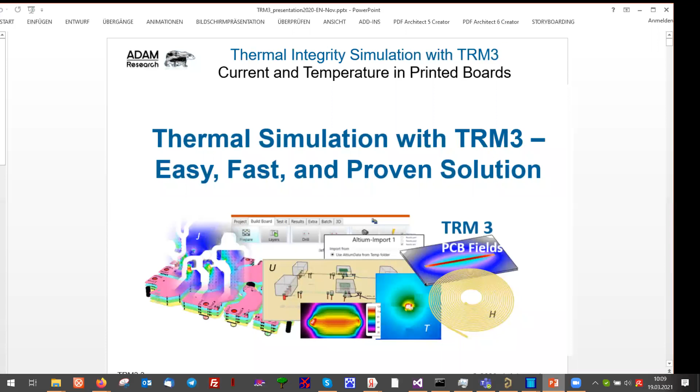So, hello, everybody. Thank you for participating in this demo. We are talking about printed boards, temperature, but also about current and voltage and watts and so on. TRM is a type of software dedicated to simulate the thermal behavior of printed boards. It's thermal risk management. And you know that the temperature is always limited either by the board parameters or by the silicon and junction temperature and so on.

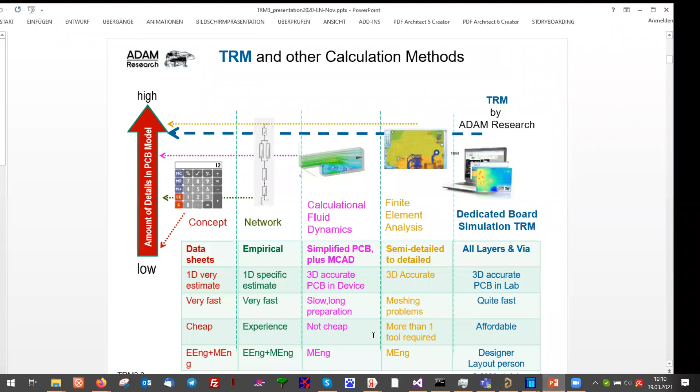Maybe you think it's easy because we have data sheets, but it's not easy because the data sheet does not represent your special PCB, neither the stack up, nor the layout, nor the distribution of components and so on. So even if we have identical heat sources on a board, we get different temperatures depending on the local environment of this component and the local heating and the local cooling. So a data sheet is never representing your board. What can we do? Of course, we can simulate and calculate.

And because it's a board simulation, we rely on the standard files to receive the data. And the standard files are the Gerber files, the drill files. And for the components, we are using IDF, but you can also draw your own components using your mouse. And for the net list, we have different ways. For example, the IPC format 356. And you can feed in CSV and ASCII files and so on to create non-standard stuff.

Using the Gerber is not sufficient. We also have to supply physics data. For example, the watts of the components or the amps in the nets and so on, but also ambient conditions. So what is the ambient temperature of the board? What is the heat transfer from the surface of the board to the ambient?

Is it standard air cooling by free convection, or do we have a fan with a certain fan speed and/or air speed and so on? And at the end, you get a result, of course, the temperature. But if we use amps to heat the traces, we also get a distribution of the electric potential, and we get the current density. And from the current density, we get the heating. And the heating is giving some temperature. Of course, watts and amps can be combined. That's okay.

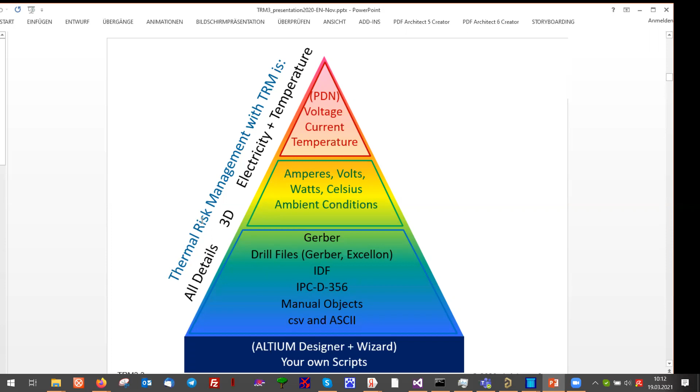What are we talking about? We are talking about a flat geometry, a printed board. And the printed board has, of course, a layer stack. Those data and the layout come from your design software. We have components on top, maybe components embedded, which may create heat or not. And we have some sort of components or pads which we can use to feed in electric information. So we have a positive pin or pad and a negative pin or pad, and both are connected by the copper in the layers, and electricity can flow in this direction and is creating heat along its path.

There are of course drilled holes, either plated through holes or blind or buried vias or non-plated through holes. The number of drilled holes does not matter. I've seen models with 30,000 drilled holes.

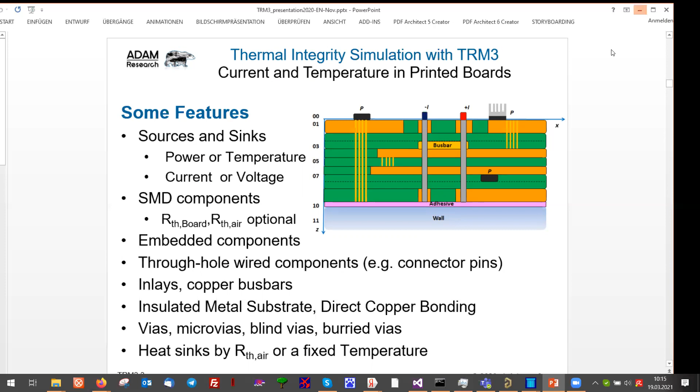You can also add something inside yourself, bus bars, to increase the local width or height of a trace. And you can, of course, bring some heatsink or the parameter of a heatsink, the thermal resistance, onto any component and so on. Okay, that should be enough as a preface. I will now show you the software with two or three different use cases.

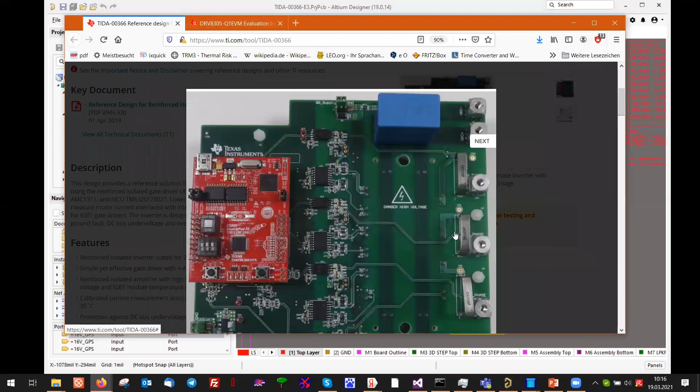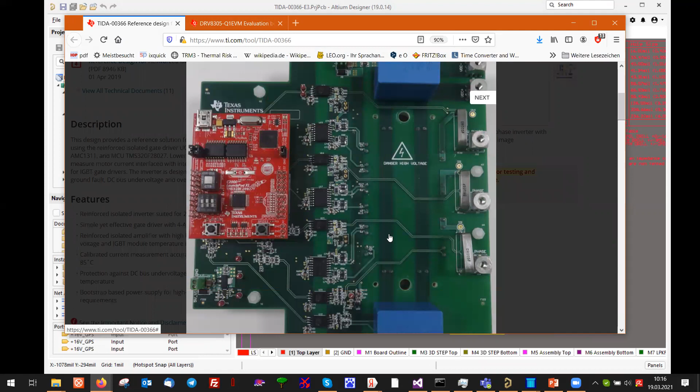So for the Altium users among you, I've looked for a test piece, and I found, for example, this one. It's a Texas Instruments evaluation board with some MOSFETs here and obviously some fat traces or bars to carry a high current from this connector to the MOSFETs. So I will not go very deep into details. It's just a test case.

And my test case poses the question: if I have, for example, 12 amps on this connector, and I allow the current to go this path here to those MOSFETs, what will be the temperature, or what can we expect as an effect of the current heating?

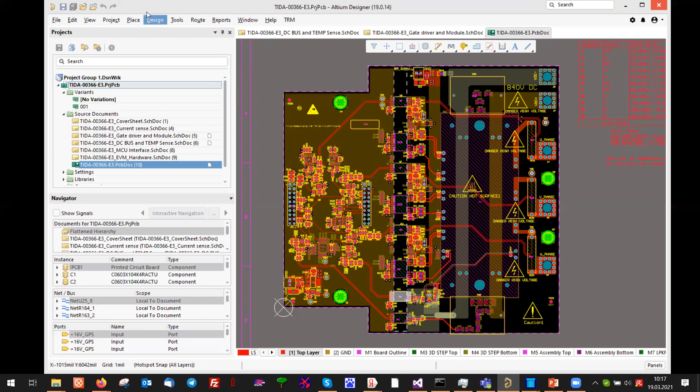What we need is, of course, an Altium project. And now the easy part is we have a button here, TRM. And when I click the button, it's exporting everything we need. But if you want to do it, you can also add some parameters in the schematics.

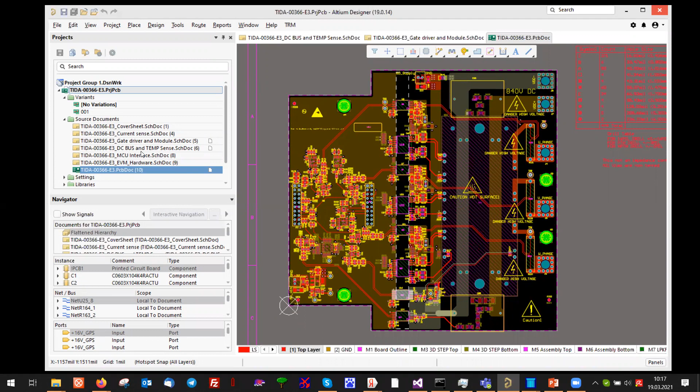For example, we can assign the 12 volt to this connector, 12 amp, sorry, and another minus 12 amp to one of those MOSFETs. And that can be done in the schematic. For example, if I use the gate driver, here you see connector number 9, and it's got a parameter.

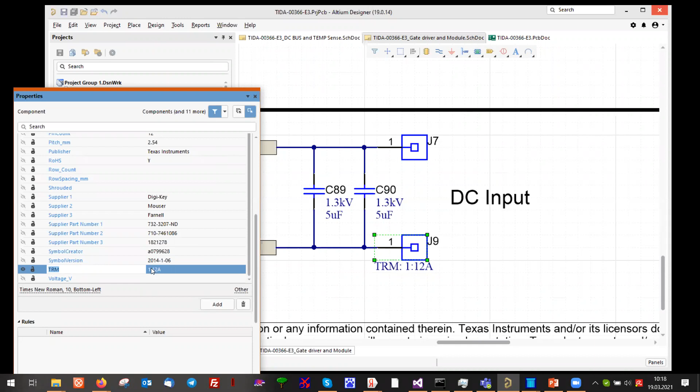The parameter name is called TRM, and the value is 1 for pad number 1 and 12 amp for the data. And you see it here in the parameter list. Just add a parameter and you know what to do. And we have to have a counterpart, minus 12 amp. And the minus 12 amp, I just deliberately used this component, U16.

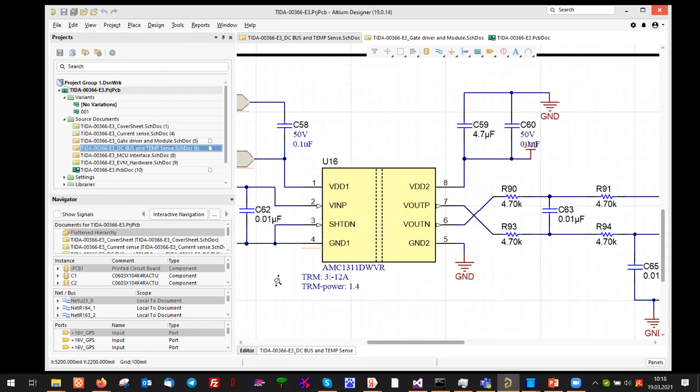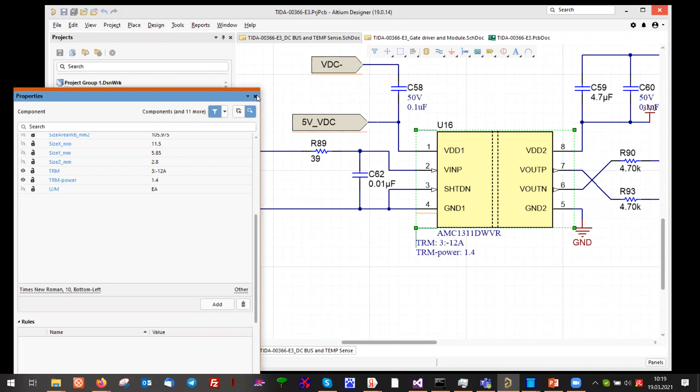And you see pad number 3, which is connected to this net of VDC minus. It's getting 12 amps. Yeah, it's just minus 12 amps. It's just an example. In addition, I can add also a power value in watts, and this value should be 1.4. Everything can be modified, deleted, and changed in the TRM simulator. This is just one way of delivering data.

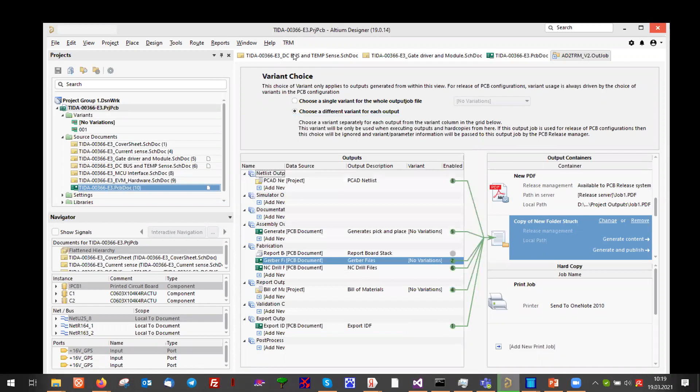Okay, now we go back to the PCB document and say TRM. What you see is a script developed by us, which is starting an OutJob plus some extra work to export these parameters, to export the netlist and the placement of the components, etc. Okay, now it's done. And we can start and open the TRM simulator.

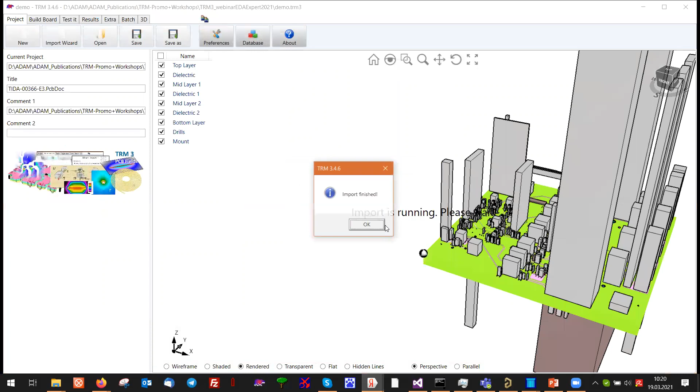I start the import wizard, Altium. I use all the defaults, so don't worry. It's not a training. I have to enter a name for the project. It's reading all the Gerber files. It's also converting all the Gerber files. And at the end, it's done. Don't worry about these very tall buildings, the components.

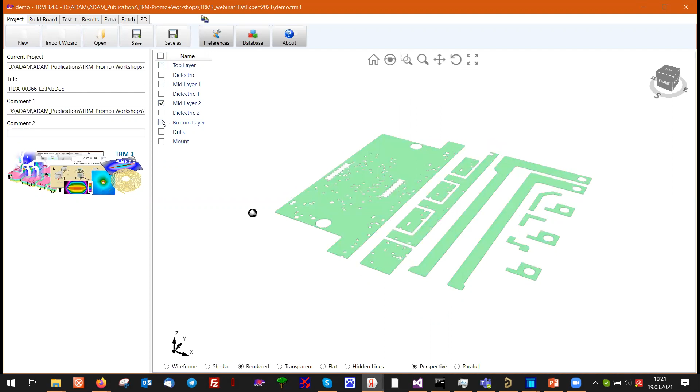We have an expansion factor of 5 by default, so that we can easier look into details of the layers. So this is the import of the top layer. Then we see the bottom layer and so on. We also identify the drilled holes. We have in red the plated through holes, in black the non-plated throughs. There's no blind and buried or back drills here. And we have, of course, the dielectric in between.

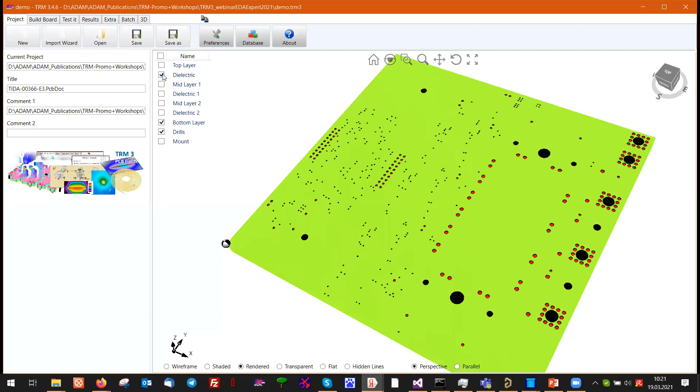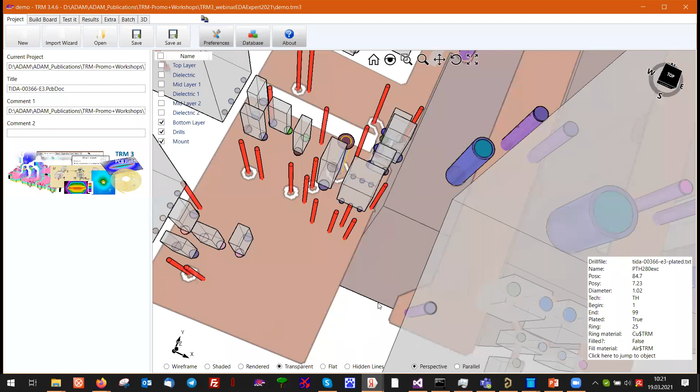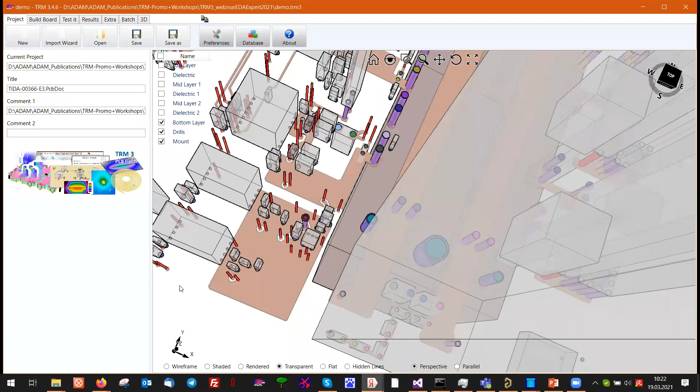And we have the components, but not only the components, this gray stuff. We also have colored pads. For example, I will show you in another table. Here we have this green pad. The green pad is part of the plus 16 volt GPS net, and it's connected to component D4 and connector number 2. And of course, this pad can be carrier of electric values, and the gray parts can be carrier of watts thermal information.

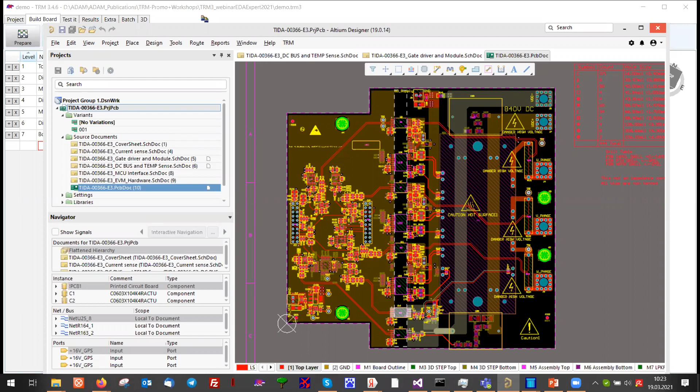If we go to tools, no, design, layer stack manager. You see that the first dielectric is 60 mils, which is more or less this value. Okay, I don't say it's a bug, but we can repair everything here, and you can change your import whenever you want. And you can try and play with all the data to make a good thermal design

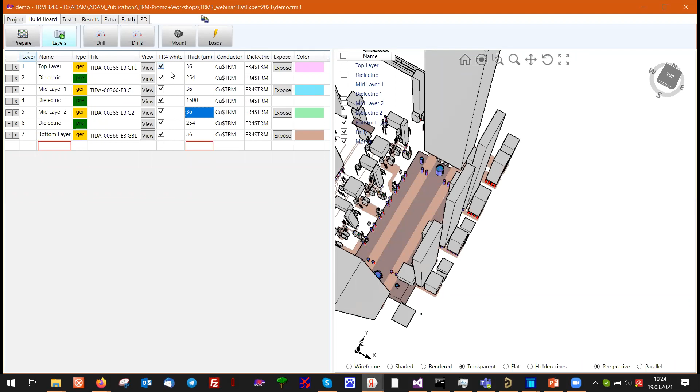for your production phase. Okay, then we have the drill file, so I don't need to go through all the details, but each drilled hole can be touched, can be deleted, can be moved, and so on. At the end, what's interesting for us is what we call the loads table. And in the loads table, you see some interesting stuff. For example, the name of the components or the reference designator. You also see columns called watts, Celsius, amp, and volt. And I think you expect here some value.

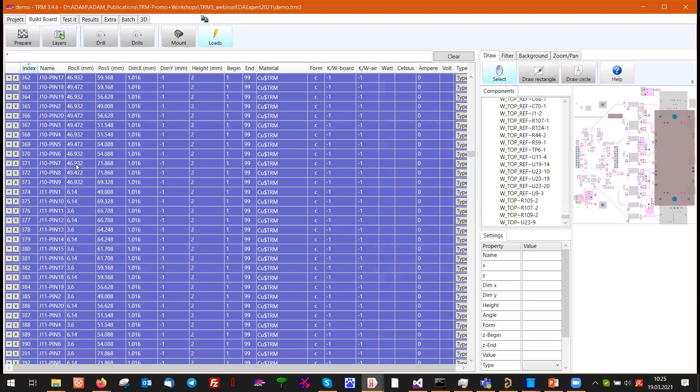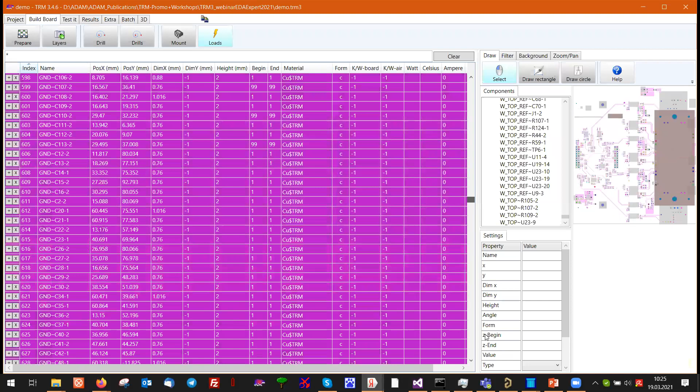Here, for example, the 1.4, remember we added the 1.4 watts in the Altium schematic for component U16, and that's the result of the import. And now I can do whatever I want. Either I accept the 1.4 watts or I say 0, etc. And then we scroll down, we see a list of pins, which are solid pins penetrating the board. And now we have pads here. The pads have a net name, a tilde, and a component name and a number. Somewhere we should have our values from the schematic, but there's an easier way.

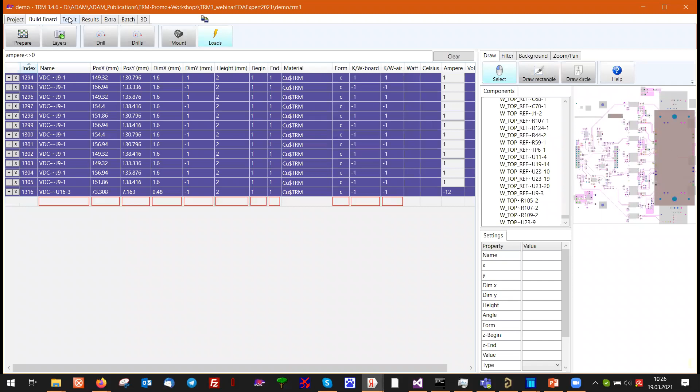Okay, that's all you have to do. And now we can go to the test phase. We can calculate something. First of all, we have to define the environment conditions. So let's assume we are in the lab and we have 25-degree ambient. And we go to calculate, and we can start the calculation. It will take, say, 1 minute to calculate. It's just a push button here.

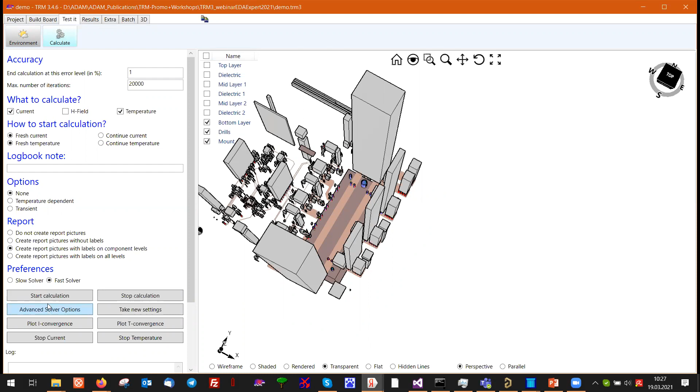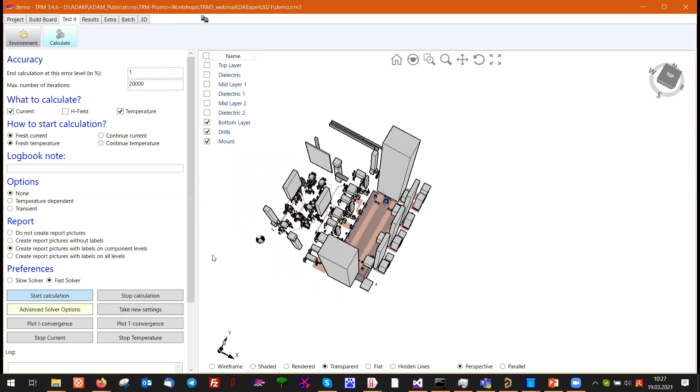But of course, I prepared something for you. We can start, and then I come back after having shown other things. This we can do, of course. There is something special. Okay, and I start the calculation. Here's a log window telling you what it's doing. And so on. It already calculated the heat created by the amps.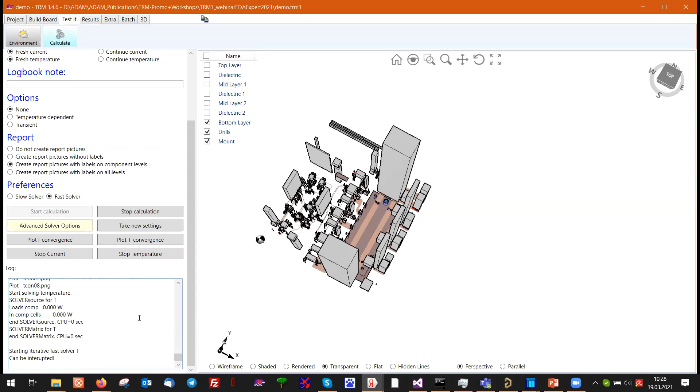It's 2.699 watts. You see it, and these 2.699 watts are now imposed into the trace, and it's heating the board, and of course not only the trace but also the board and so on, and the components. So while calculating the temperature, a short info for the non-Altium users among you.

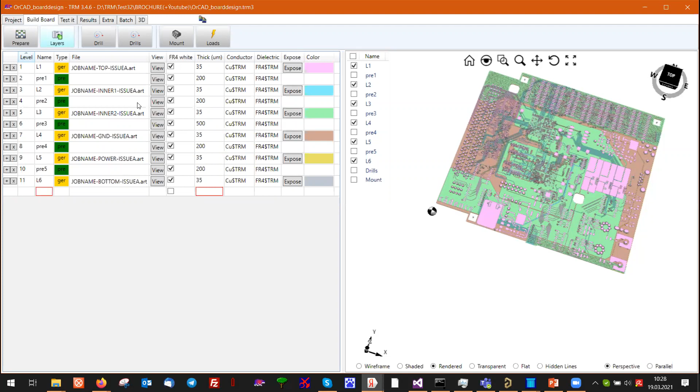So for example, if you are an Allegro or OrCAD user, it's no problem to import your data here as well. So first of all, you have to create the Gerber files yourself. And then you start, oops, sorry.

Well, that's of course a demo effect. I did click the wrong button. Sorry. Sorry. So let's do it again.

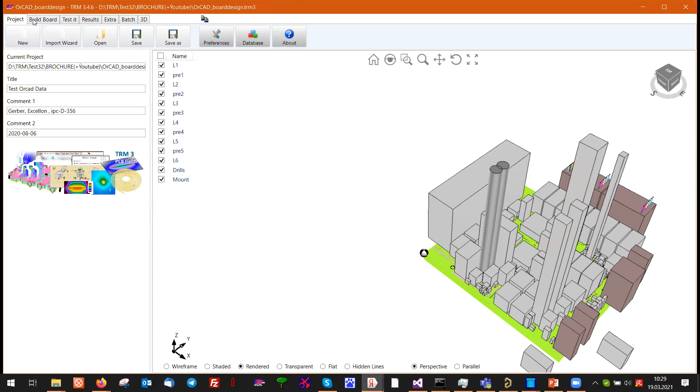This is the OrCAD design. Remember, we are calculating in the background. That's why it's a little bit slower. So if you are starting from fresh, you go to Build Board, to the Layer tab. And what you then do is you say, create an empty template for n layers. And n in this case is 6. We have 6 layers.

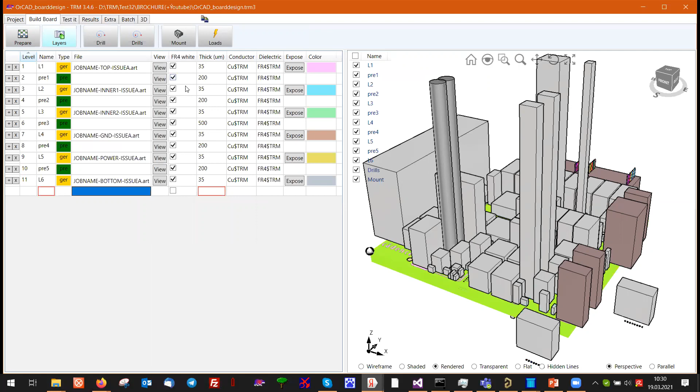Or if you're able to script in OrCAD, you can create a template. The template is a text file with just this information you see here. It's a comma separated file. And if you then select import template, it's filled automatically. So this is then the result and so on. Same procedure for the drill files.

If you always have the same drill files, or if you have a script, you can also... In the background, it's writing the results. That's why it's a little bit slow, we have to wait. It will come in a minute and a second.

The template you can create in OrCAD is, again, just what you see is what you get, and you have to convert or read the file, and then you will get the placement, etc., of all the drilled holes, non-plated, and the through holes, and so on. In that case, we have blind vias. We have through holes between layer 1 and 6, and we have blinds between 3 and 4.

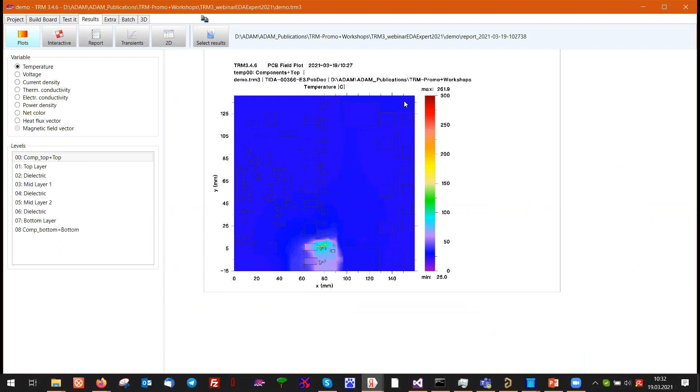Okay, calculation done. Let me go back to this one. Now we can see the result. This is the result of the temperature. Remember, we are starting with current here and end here. This is a little bit strange in the top layer. Now we go into the board. It's always also a little bit hot, 260 degrees, which means that 12 amps is far too much

for this trace. It's not a problem for the big parts of the trace, but here we have a problem, and that's why: the thick part is in 3 layers, but the connection from here to here is managed in 1 layer, in the mid layer 1, and this is a critical point.

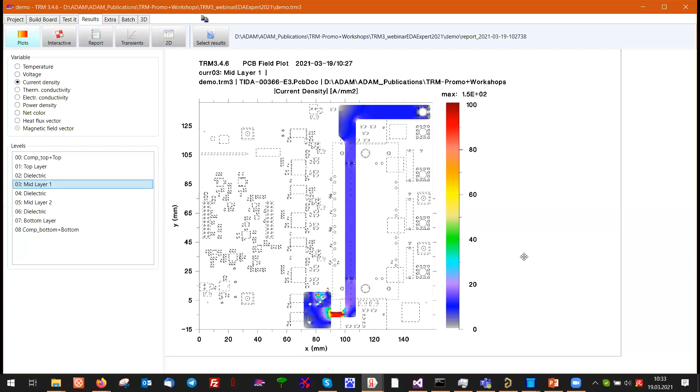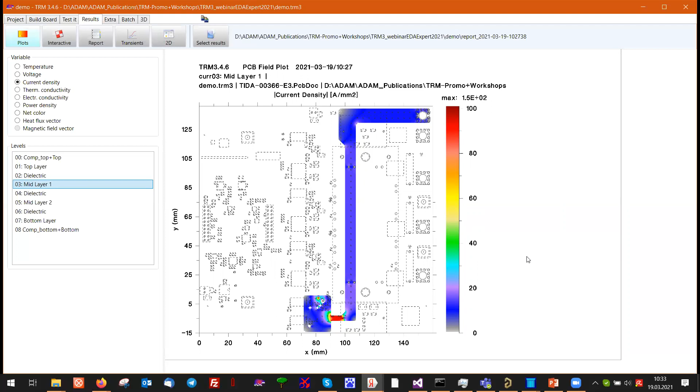Maybe it's easy to... you don't think initially what could happen in your design, and that's of course a theoretical prediction. The quantity I'm showing here is the current density, the amps per square millimeter.

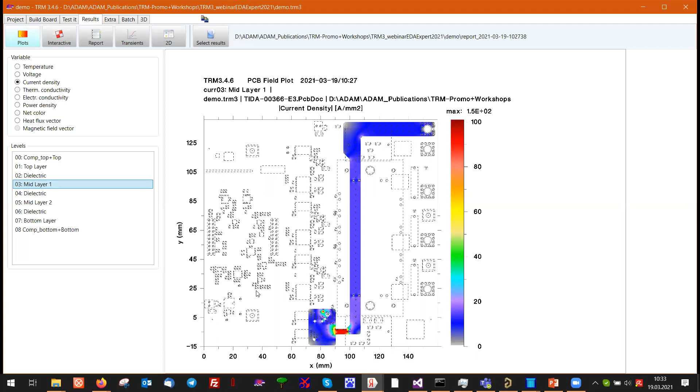And the amps per square millimeter in itself are not related to temperature. The temperature is created then using the copper around and so on, and the environment condition as a physics way of calculation.

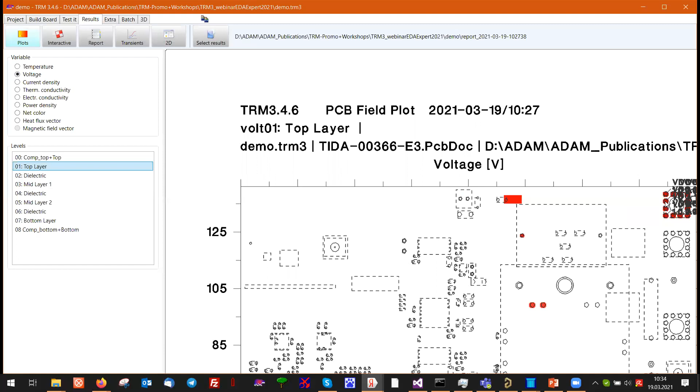Okay, we also have the voltage here. You can calculate the voltage drop between this point and between sink and source. For example, here we have a potential of 8.9. Don't say it's voltage, it's a potential. And we have a value of 8.8, which then is a voltage drop of 0.1 something volt or 100 something millivolt. This is the voltage drop along the path and so on.

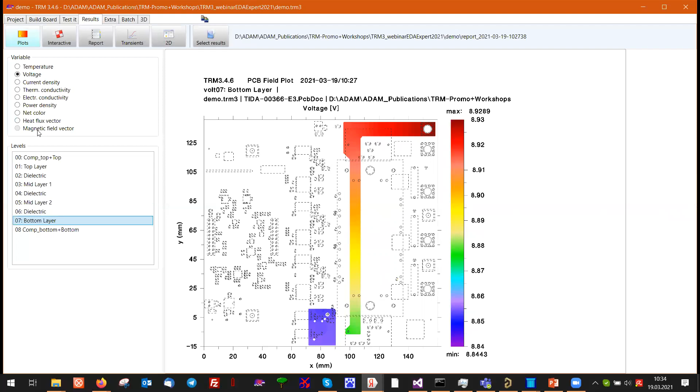The temperature now has been calculated without the power of the component itself. What you have to do now is, of course, either reduce the current or increase the thickness of the trace. Now let's have a look at the other examples.

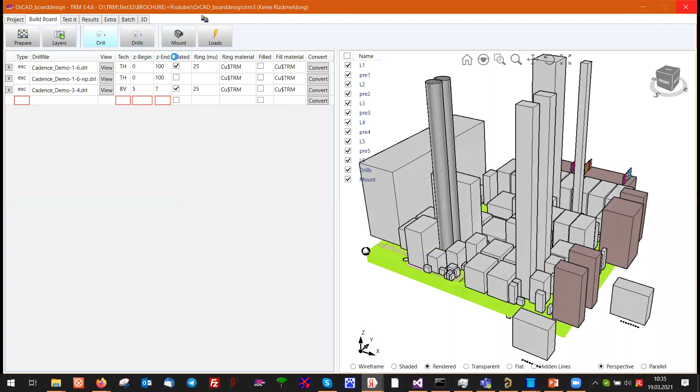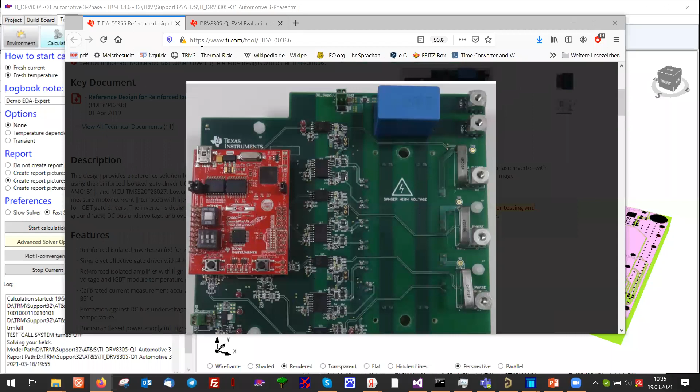Here we have, what's this one? Let's have a look at this one. This is also a Texas Instruments test board, which is a little bit more interesting. No. What happens?

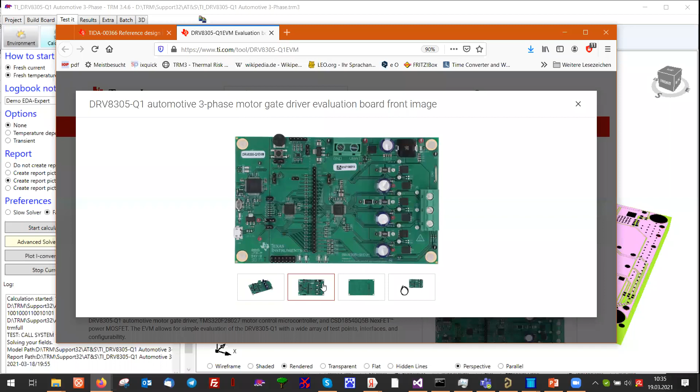Okay, we have here ground and VBUT, and we now feed in some amps into VBUT, but we make the MOSFETs and the shunts electric conducting, which means that the current finds its way through the components back to ground. In addition, we can assign an electric resistance to these components, and by this we get a voltage drop, and we get a local heating for the MOSFETs and for the resistors.

For the MOSFETs, I'm using the RDS on value from the data sheets. The resistance of the shunts is known, and for the current, I'm using an RMS current, so I'm using a DC approximation to this situation.

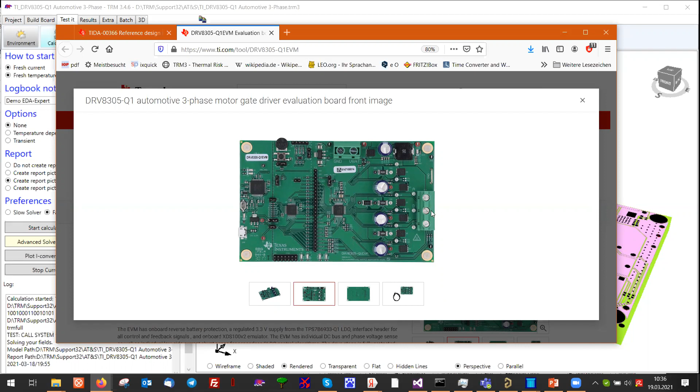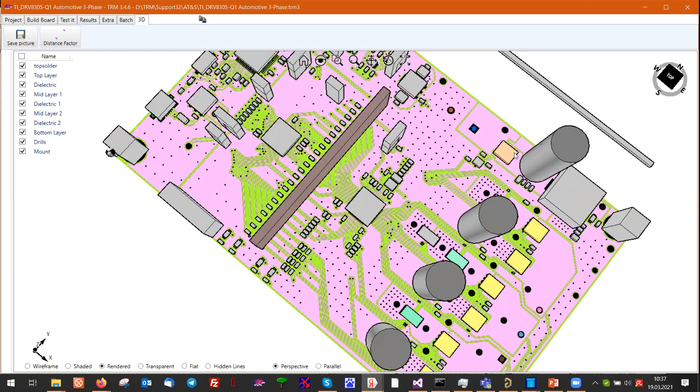And here you see what I was doing. What I can do is to reduce the factor here, so it's a little bit easier. So this is the origin of VBUT, this one. The current flows like this, going through the half bridges and then returning to ground. I can show you the results.

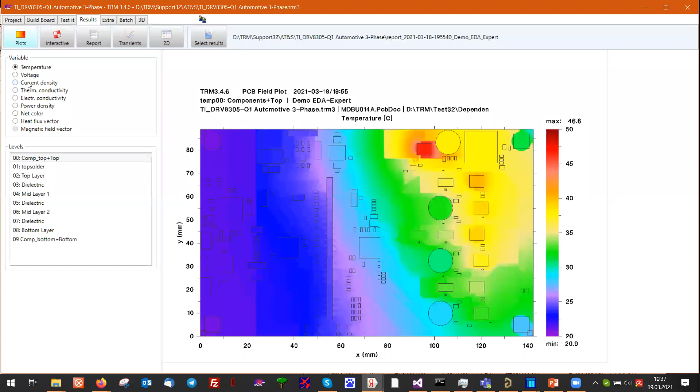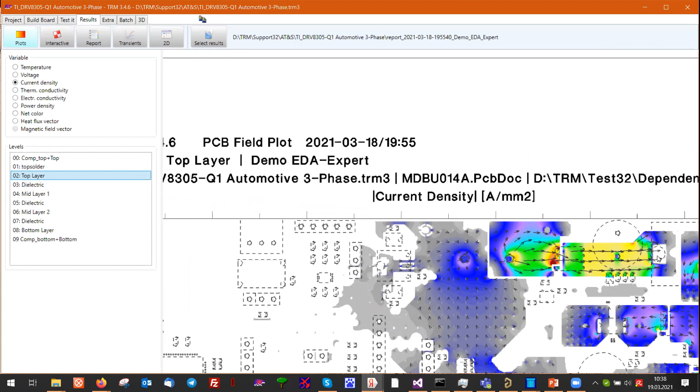For example, the flow of electricity. This is our starting point. And if you go to the top layer, we see that the current is escaping from the top layer. It's entering into this diode and then goes on, and it goes into the MOSFETs and out of the MOSFETs, and then it's returning to the ground.

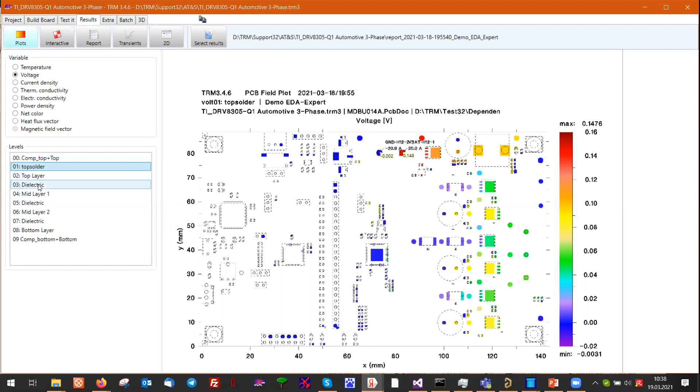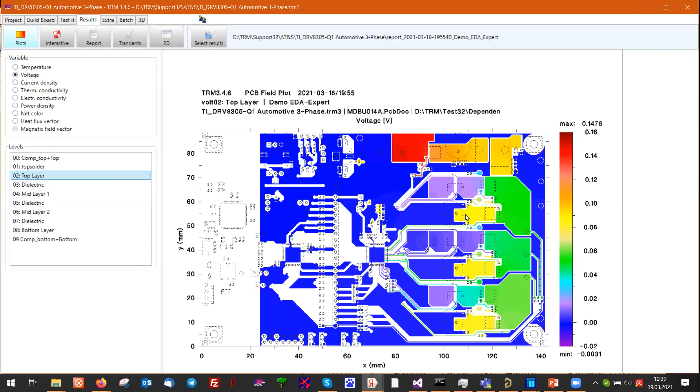You can also see the voltage drop. So we start with a high voltage value and end with a low voltage value, and the total voltage drop along this path is more or less 0.15 volt. Top layer. You see the change in color from green to yellow. We have a voltage drop according to the resistance of this component and according to the local current passing this transistor.

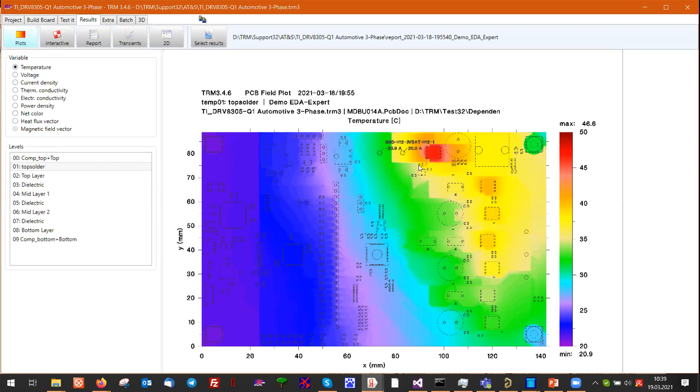Okay, what about the temperature? Temperature looks like this. The diode obviously has a high resistance, but also a very bad cooling situation, because those components have a complete circle, 360, to cool. This component more or less has a 180, half circle, but the heat is also trapped in the design. You see a sharp transition in temperature between this point and that point. And this is of course due to the local design.

The heat cannot jump from this point to that point because there's an insulation. And if this is a problem, you have to make this region a little bit larger to allow for more heat spreading.

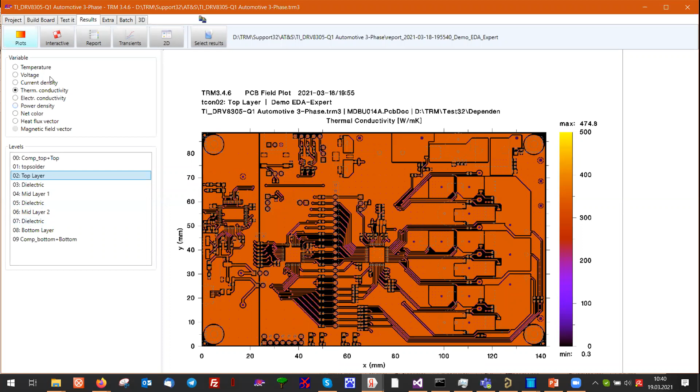What you also get is a report file where all the graphical data are in numerical form. It's a long list, but you then can identify how much heat is created where, or which amount of heat is creating which temperature. For example, we have a total heat flux of 3.1 watts. This is the electric heat plus the heat created in the components.

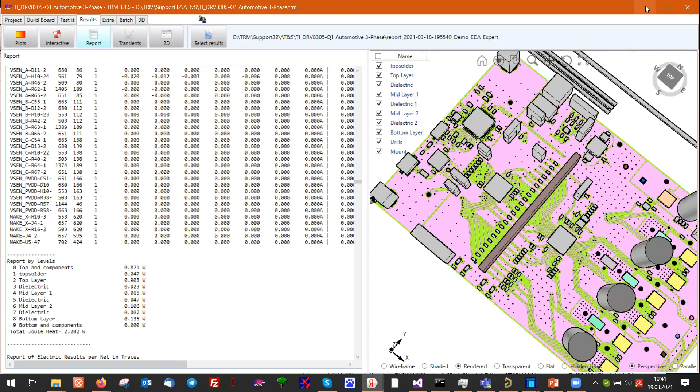Somewhere above, we see the heat created by layer. Most of the heat is obviously created here in the top layer, 0.9 watts, and the rest in the other layers. And here we have a summary by net. There's only one net in this case. If you have more than one net, you will get the joule heating for each net, for example. Okay, what else to show?

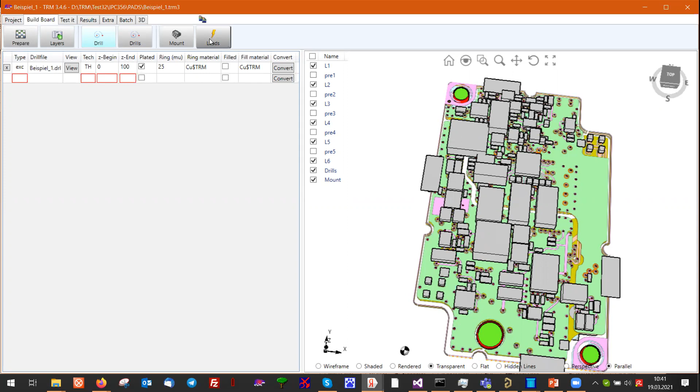If you are a PADS user, it's the same procedure. You import your Gerber files. First, you prepare the size of the board. Then you import your Gerber files, you import your drill files, and add the current or no current, or the power of the components. And in this case, I have a test power of 1 watt to one of those components.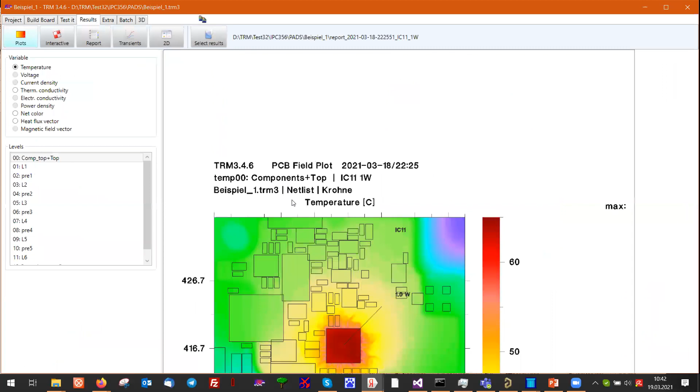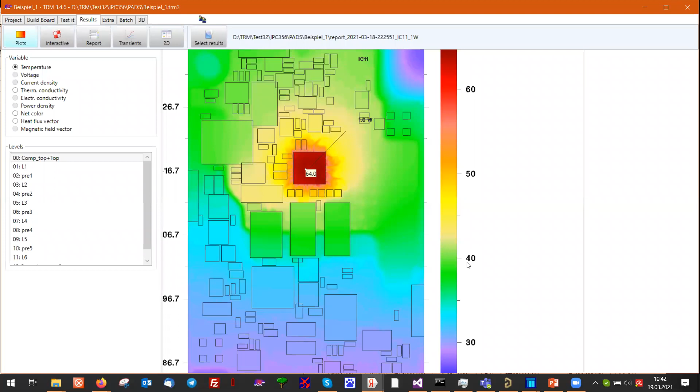And I quickly show the results. I think this guy here, IC11, is getting 1 watt. You see it here, value 1, type watt. And the heating of the 1 watt component is giving rise to a temperature of 64 degrees in that case. 64 degrees in a 20 degree ambient, which means we have a temperature rise of 44 degrees, and divided by 1 watt, which means a thermal resistance component-ambient of 44 Kelvin per watt.

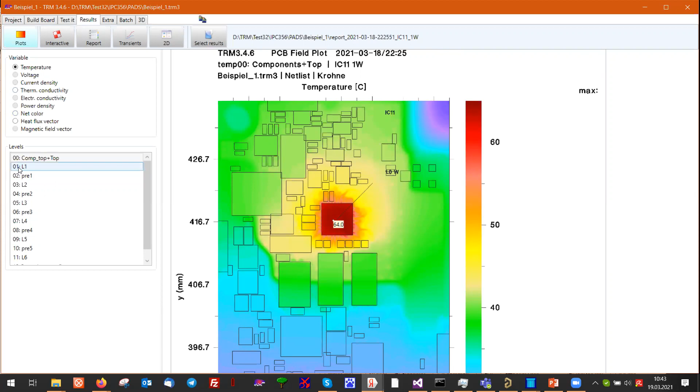Now let's have a look at the temperature map. It's a little bit funny here, this corona type of temperature distribution. But of course, this is an effect of the local design. If I look at the imported Gerber file, for example, we see in gold the copper traces, and the heat will follow partially the copper traces and then try to penetrate the FR4 and to escape to the air.

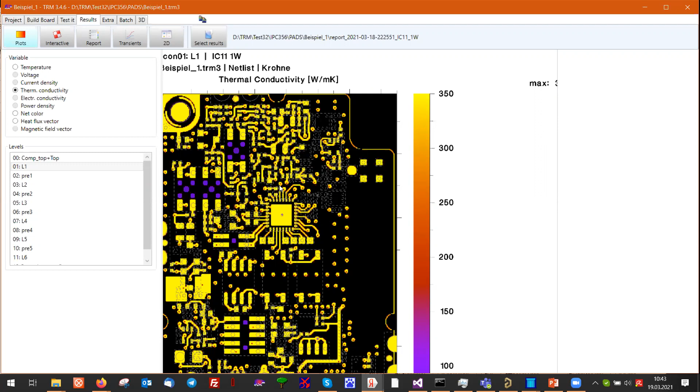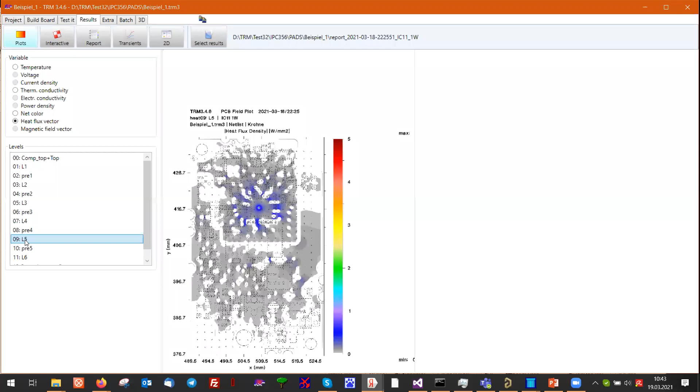We see it in the heat flux vector. Heat is flowing along the traces, and of course down, and of course up. And by this, you can identify maybe bottlenecks in your design if it's a critical point of temperature.

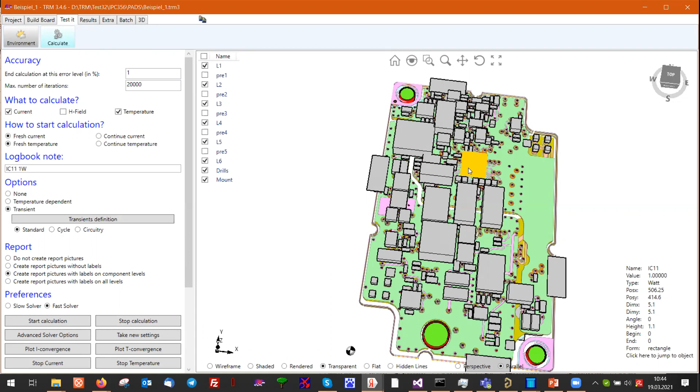What I didn't talk about is transient calculations. There is an option called transient. The standard transient is we keep all the watts and amps fixed and want to see the heating curve. Or in other words, how long does it take until some critical or reference temperature is reached in seconds?

If you don't want to have a permanent power or permanent current, you can supply a so-called cycle file, which is nothing more than an Excel file. And the Excel file is telling which component or which part has current or power in a certain period of time, or when does it start to increase or to reduce the power. And the result, of course, is a transient curve of the temperature anywhere in the model. It's done by using virtual thermocouples, which can be placed, and then you get a graph with the result.